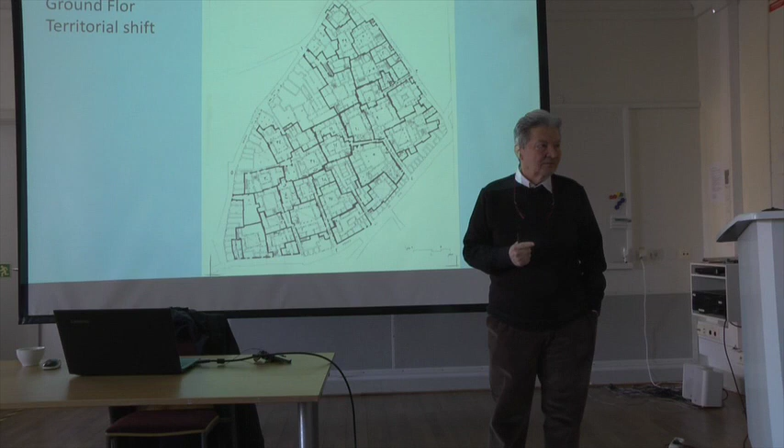We notice that in the traditional environment, almost everywhere, not only in the Middle East, maybe the people don't want to demolish what they built again and again for new functions. So they thought wisely of trying to develop designs or built environments that cost minimum when transformed, whether to other functions or to other sizes. Let me give an example here from Tunis. You see, this was originally one house. It was inherited, and then it was divided. This is the bigger court. But this unit does not have access to the street after division, so they have this right of passageway outside.

Here, for example, it's a nice exercise if you try and find a few changes. Here, for example, this sector was belonging to this one, now it is moved to this one. Maybe the owner of this house died, and he shifted some sectors of his house, some rooms, to the next neighbor, without much demolition. Here, for example, this sector was to this house, it was transformed. So if you look at the whole site, you see it here, for example.

Maybe a person had children and they migrated somewhere else, so he has a big house. He wants to reduce the size of his house. He just sells a room to his next neighbor. So this led to thinking of the built environment as sectors. That's why in the traditional environment, when they talk about buildings, they talk about names of spaces. Each space has a name. But our names now are functional. We say entrance, we say bedroom.

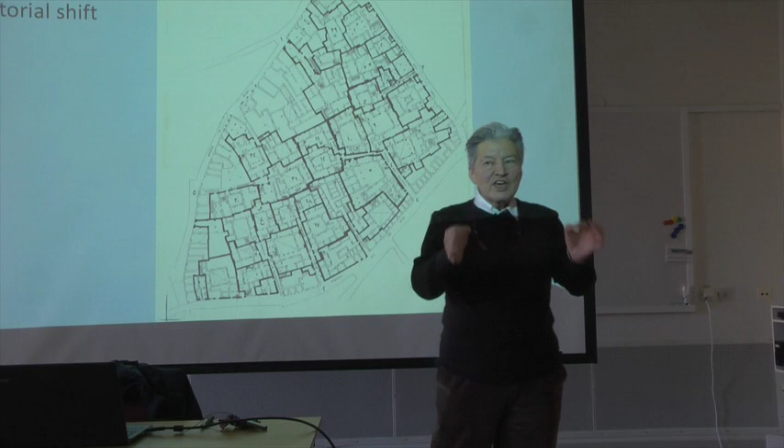The traditional names were mostly not functional, but positional. They describe the position of a space inside a larger context. This is a sunny room, this is a dark room, and so forth. And this is the upper floor.

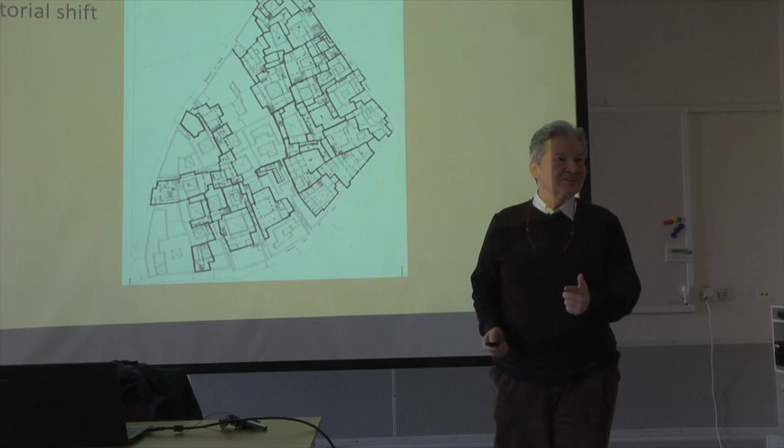Clearly you can see how, like this accordion that they play music, the territories shift between properties over time without demolition. So the fabric is helping the people's required change over time, 100, 200, 300 years, without much demolition. Just closing a door or opening a door. And that's interesting, without much demolition.

This is, for example, a house. This was a house. It was divided. This part was taken by this house. This part was taken by that house. This part was taken by this house. The house is gone. No more. It was between 3 houses. It disappeared.

Now, in order to find a design tool in which users could participate in the future, now the architect designed the building and he goes away. Then the user could come 50, 20 years later, they want to change the function of the building. There will be much demolition. And this is important for sustainability.

I think 30 years ago there was a conference about conservation and restoration. I said, in that conference, why do we always think of preserving the building of the past? Why don't we now design buildings that will not be changed much in the future? They were laughing. How do you do that? Because you don't know what will happen. No, that's possible.

We think of design as a means that allows other people, through exercising their own decisions, to reach their desired life requirements. They should be able to do that without much demolition. So we need a design tool for such task. What's that design tool?

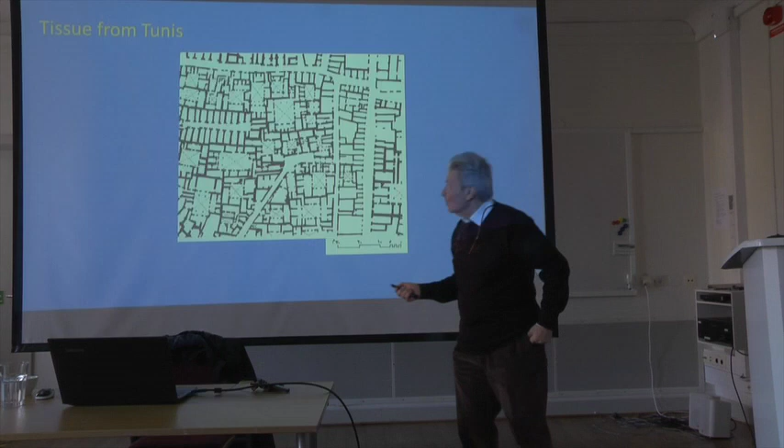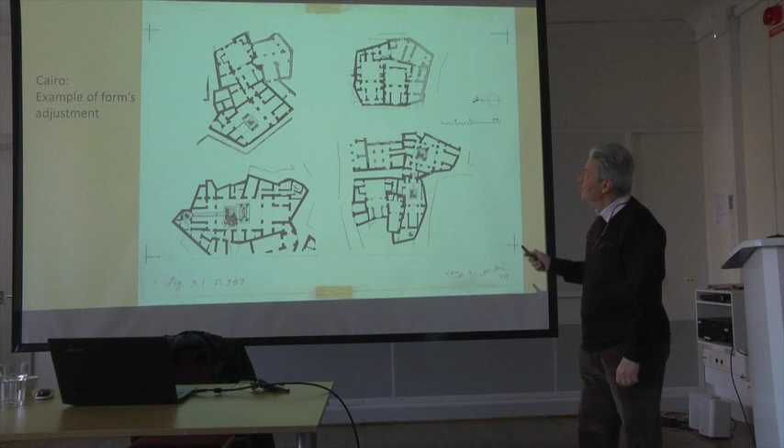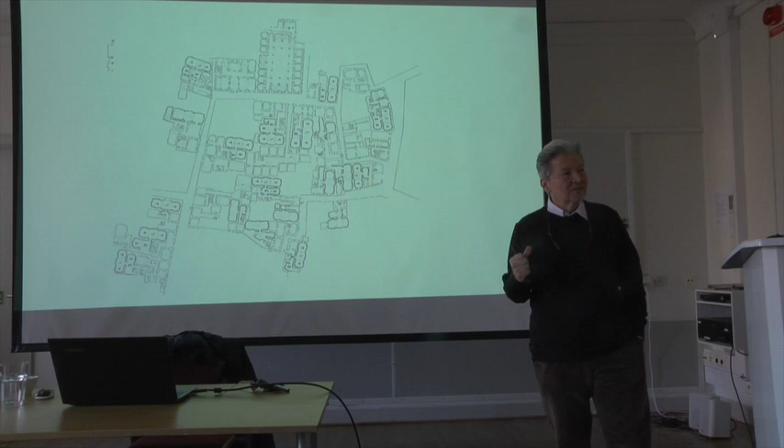Look at the floor plan of a large area of that quarter, and you see the same relationship. 1, 2, 3, those who are Arabic. The same relationship repeats itself. Why this? They're holding up to this convention because they know it works well. They're holding tight to it.

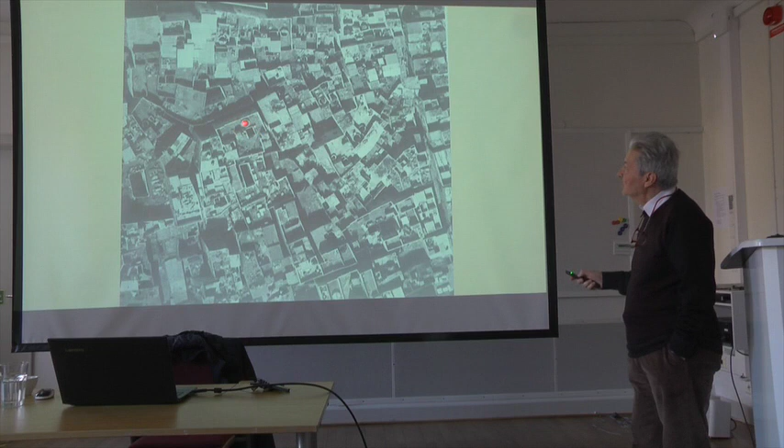And it is the central part, this one, is open all the way. This one is open all the way. So you can see it's here in the ground floor, in the upper floor, last floor. And this is an aerial view. These are the openings. And it's always this shape.

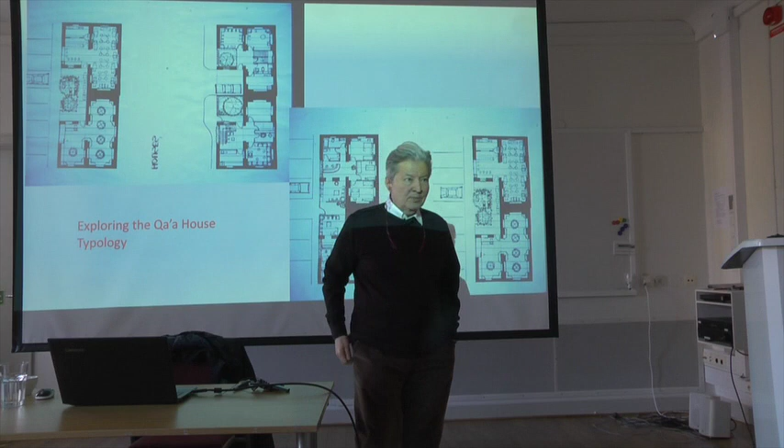Now, I was affected also by work by Stanford Anderson, where he argued that he is the person who invented the term robustness that is now much used in urban design. Robustness means that the physical environment, if it's capable of holding more functions, it is more robust. And he came up with the term latent environment, that a space could perform differently in a way that we never thought of when the people are changed.

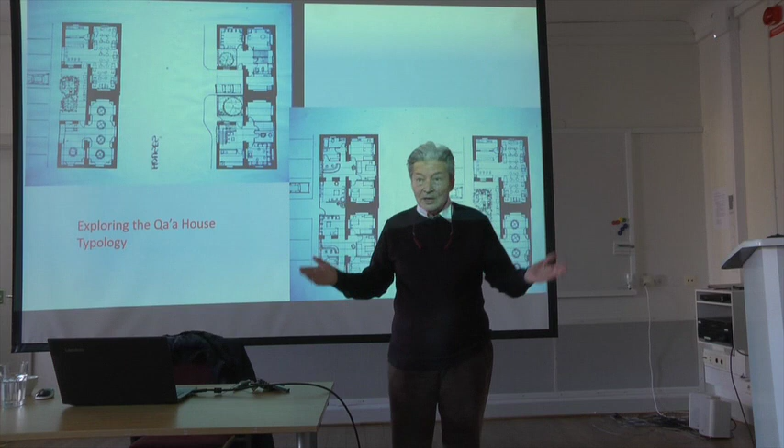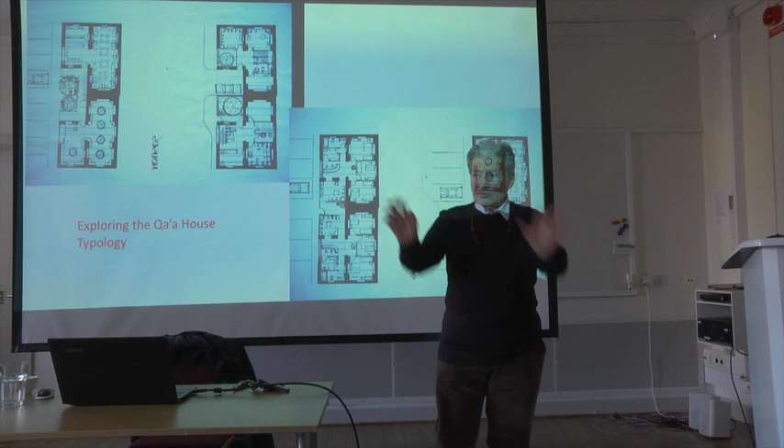If you think of the built environment like that, and how with the change of culture over time, people reuse the space. For example, typing. Before there were secretaries everywhere in the university, a room for typing. Now that room does not exist because everybody is typing by himself. There was a room for photocopying because everybody used to photocopy books, articles, papers. Now they just share it by email, read from an iPad.

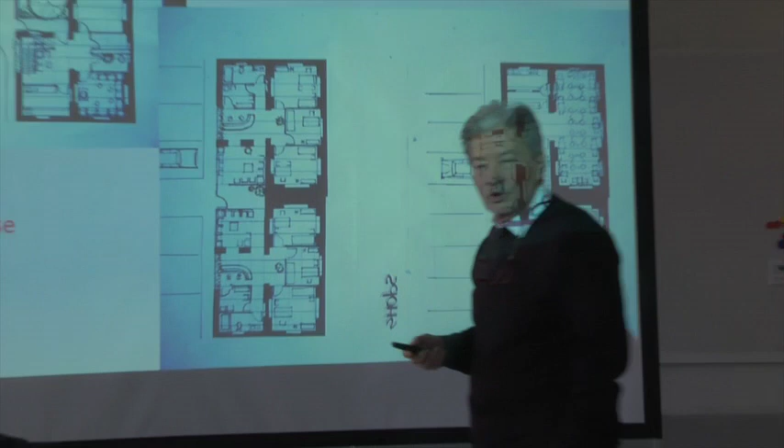So advancement of technology, change of culture, all these change the built environment. So he invented this term called latent environment. Now the question is, how do we design latent environment?

Habraken had a good answer for that, and he invented the word support, which is the parts of the building that can be constructed. When the users move in, they fill that part, then it becomes habitable space, dwelling or shop or whatever. So it is the part of the elements beyond the control of the users. But if the architect is clever enough, he will develop a support that lasts longer in life with minimum demolition.

So designing support does not mean flexibility. Because most people, when they think of change, they immediately think of flexibility. They say, okay, we'll make a few columns inside the building, and then people can move around. No, for the users who are not architects, the columns may hinder them from adapting to change. Because the distances between the columns may take not one function but two functions, or may take 1.5 functions.

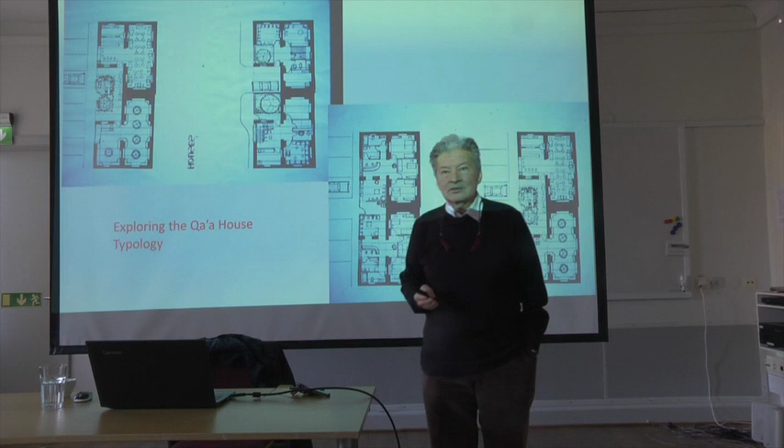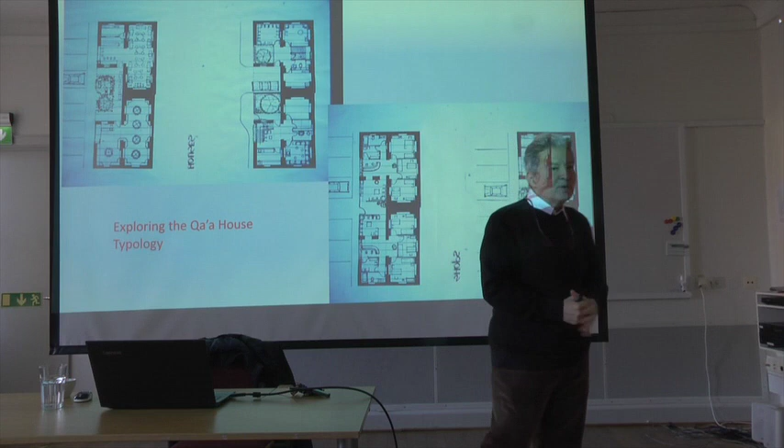So a good building that adapts to change does not mean fewer elements, but it might mean more elements that would help the users in the future and say, this is a sunny place, I can make it a living room. This is a dark place, I can make it a kitchen, and so on. So it helps the users and guides the users to reinvent the space. And this is a challenge.

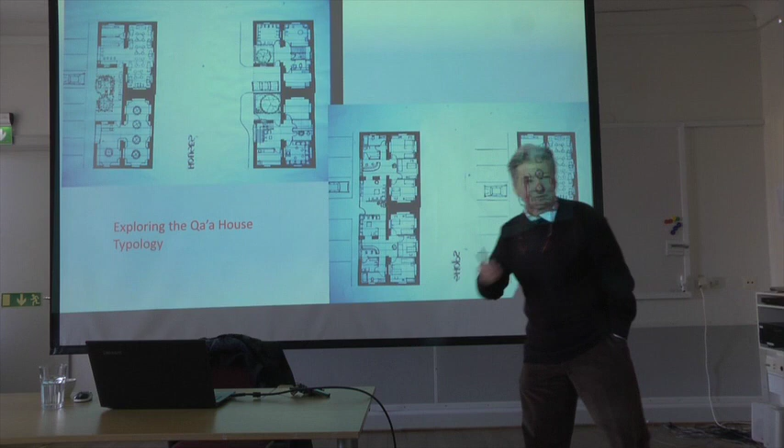Let's take this example. Here, I took just this part and gave it to a student. Just this part. Let's see what's happening. Just explore this relationship. This is that part, he flipped it as a mirror image. I hope you excuse the writing because the guy who did the scanning needs correction. Okay? It was used differently each time.

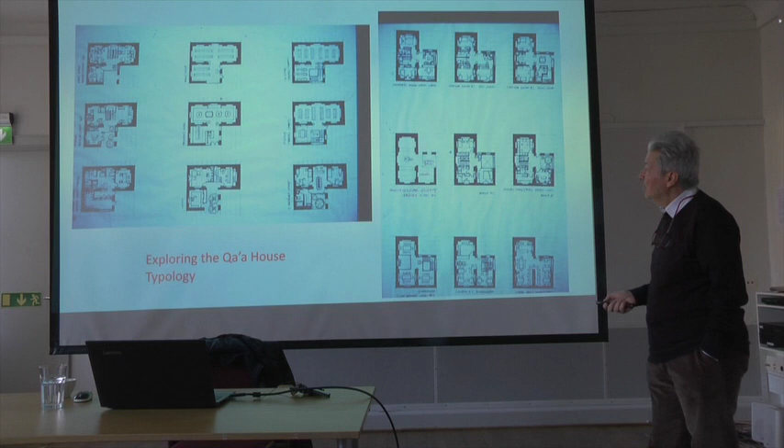Sometimes living, sometimes classroom, restaurants. And it reveals different potentiality. Now we put it, now it is two joined together, now it's three. We're just playing with it to see how it works.

Why do we do this exercise? We hope to understand what elements should go where. For example, a clever architect may say, okay, I'll make a column in the corner there to allow the people more usage. Inside that column, I could put the electric wires, water pipes, and it is a supporting column.

What he did now is that he tied three live systems together, and I like this term from John Habraken, live system. What he did at that time, he brought three elements that are live. The electric system is one system, the water system another, and the structural system is a third. He put them together in one place, which would make it difficult for user change in the future. These three elements should be almost separate.

So it's always difficult to decide where the duct goes in the building. This is another example of exploring a typology.

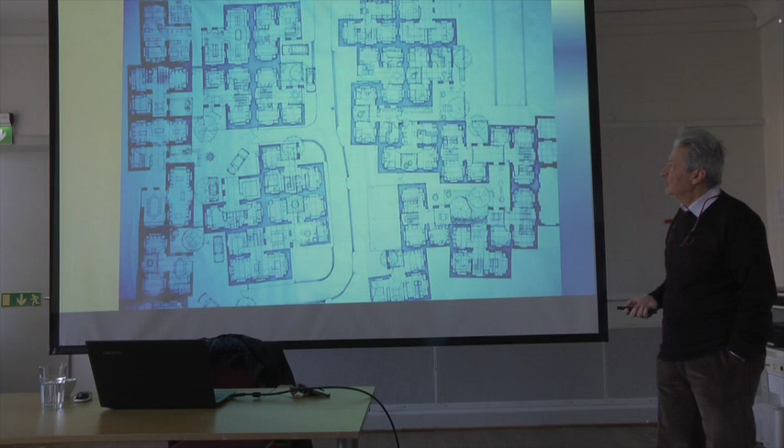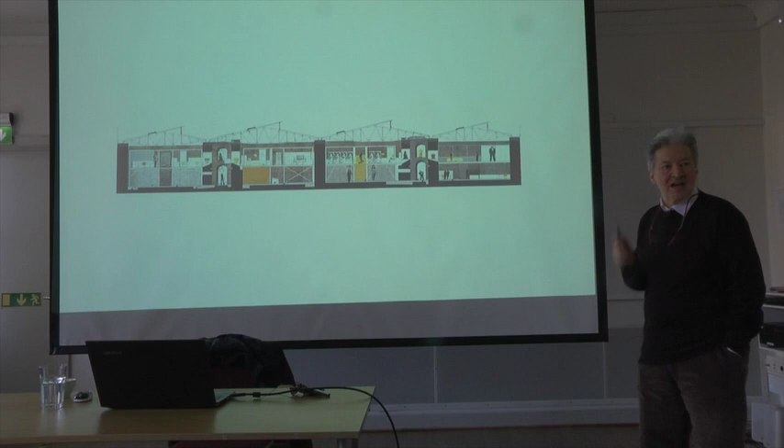This is an example of, you can say, a failed example where the architect, I think in the 17th or 18th century in Istanbul, designed a storage. It was storage first. Simply because it's designed in that fashion, it does not accommodate much change. It was difficult to change because it was designed for a specific function as a storage. Now they are redesigning it to fit new functions, and you can see a corridor without light and so on.

This is another example of a student who observed this structure in Istanbul. So they kept the outside as it is, and it was transformed to another function.

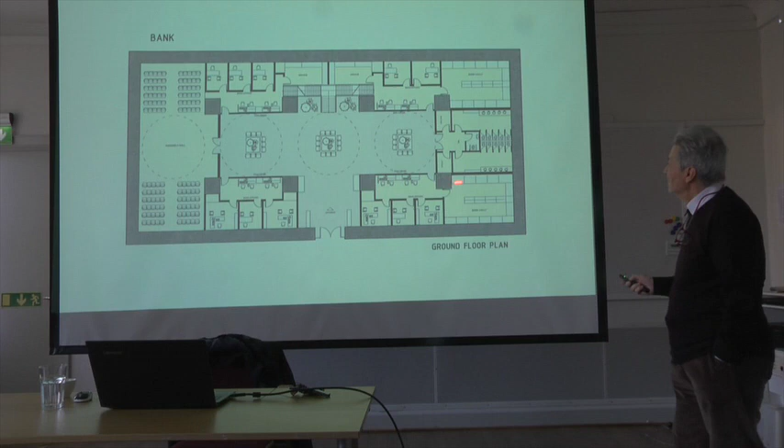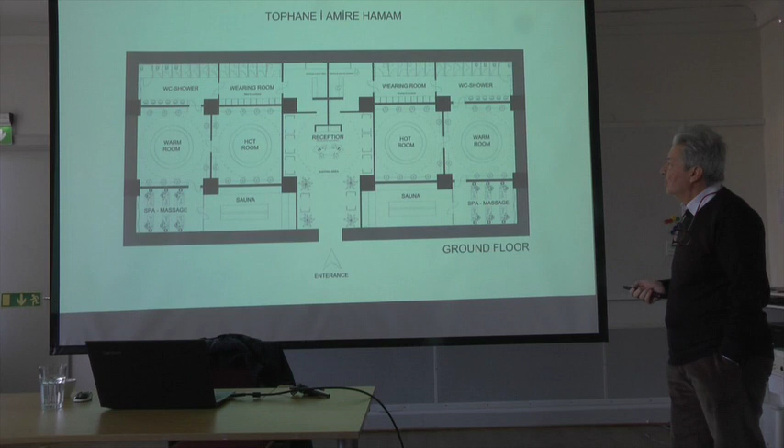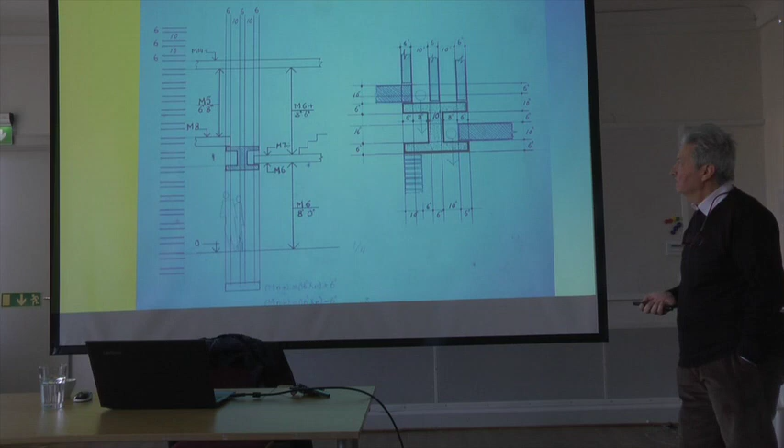What I was trying to say is that the built environment is constantly changing, and we designers are designing something with a specific function that later is difficult to change in the future, and we have to find a method to adapt to change. This means that we do not necessarily design buildings, but rather we create a system that becomes buildings that adapt to change. So what is the system?

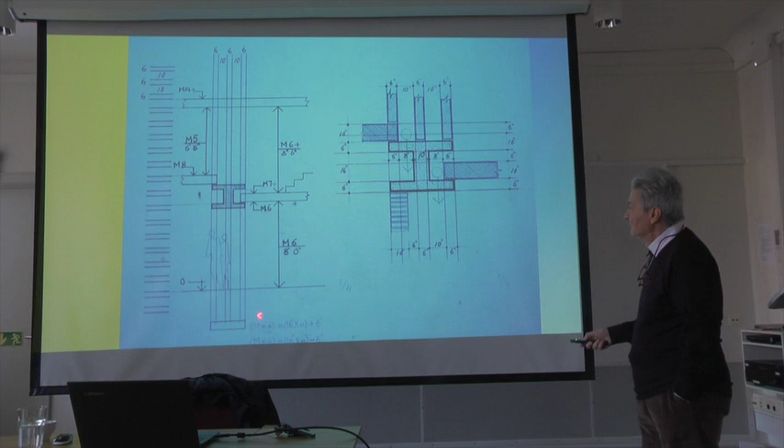Let me take this example that was designed by Jamel Akbar, and I did the drawing, where the system is a large I-beam, a slab that can come here or there, and this I-beam is running parallel, carried by walls, by columns, and it could be like this on the side. This is square, this is a large building, and these are the columns that carry that I-beam.

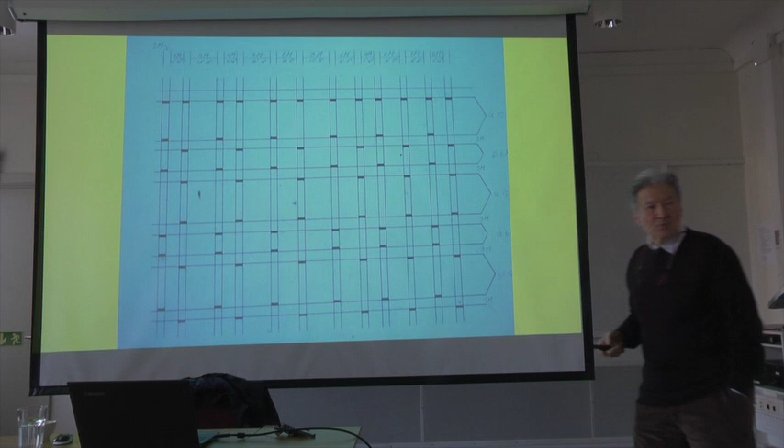So there are varieties of distances here, which is another study that would add more potentiality to the site. So these are the I-beams and these are the columns. Now we can plan the section and we can have varieties of heights in the section because of the I-beam.

Street, two sides. Now, if you remember in the beginning, I talked about margins, and that this is the zone in this building, and there is a margin, and there is another zone there that is not facing the outside. This zone will draw functions to it simply because it is facing the facade.

The same here, there is a zone here that we call the alpha zone, and there is an internal zone here. Between these two zones, there is a zone. So we should expect, from observation, certain functions that can be drawn into these zones, that the user most likely will do in the future.

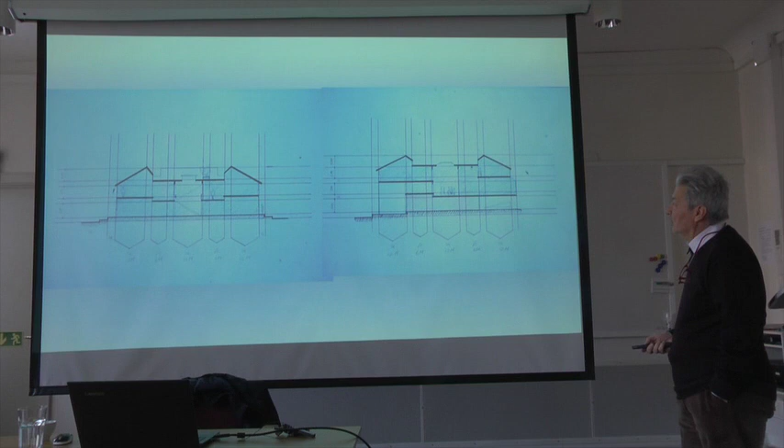Another type of this: commercial on the ground floor, residential above. Now this is the interpretation of one of the students, the American student, of how the floor plans can work. This is my drawing. At that time there was no computer, so it's hand drawing.

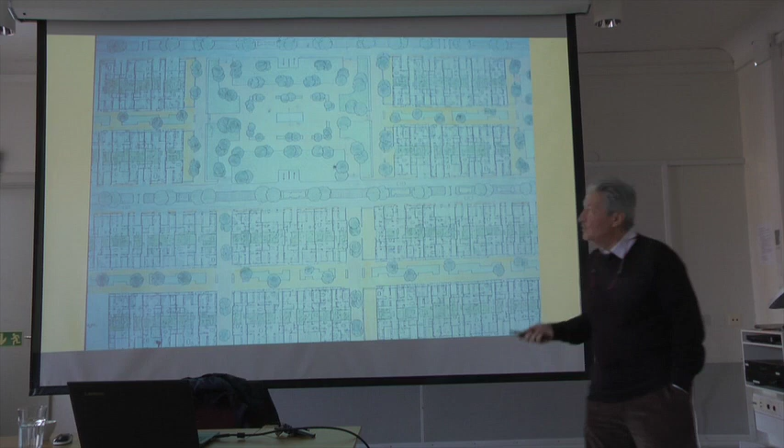And you can see there is a small size unit, larger size unit, units that are divided into this part, second part, and so on. So there are hundreds of possibilities that can fit the system. And this could serve the user's needs in the future without much demolition. And that's good for sustainability. This is another student's work. A third student's work.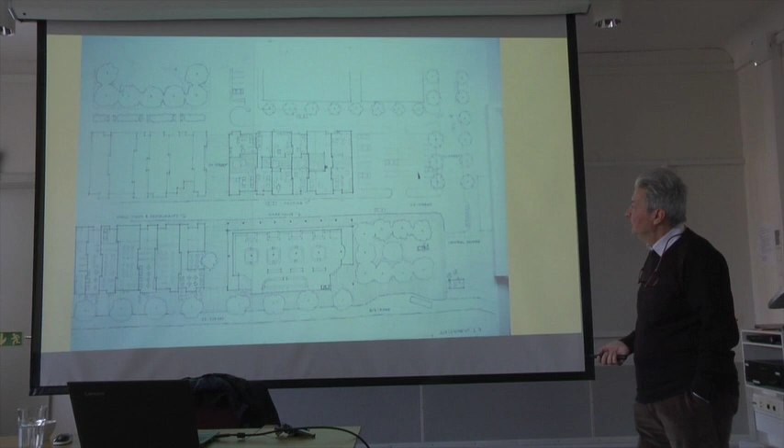Now, unfortunately, this line of thinking stopped. It continued within the capitalist system. If you remember the first day we talked about capitalism and three essences for accessibility: for resources, knowledge, and permissions. Because capitalism continued, and especially Reaganism, Thatcherism, the 80s, and so on, Habraken was retired, and this line of thinking continued fast within the capitalist system, which we know now as the open system. The open system started from this method.

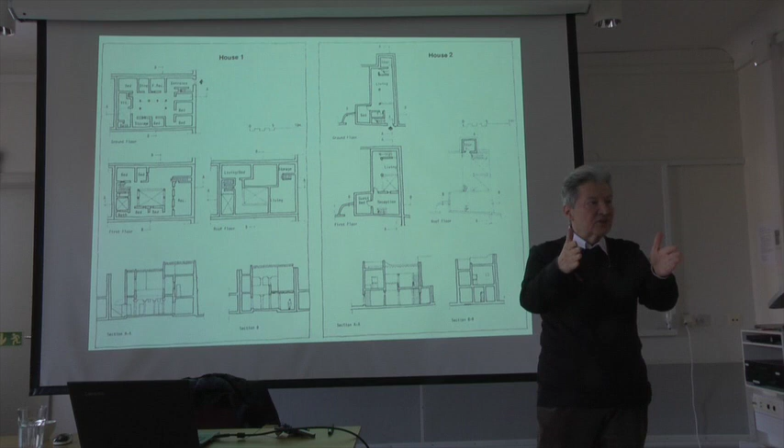Now we see in the office buildings, they have open space, they rent you a space with a few columns and surfaces. The origin of that is from here, but because of the economic structure, the investors have to lean to the user's request, so they sell them spaces with maximum freedom. And it flourished well in office buildings, but not in the housing sector. So this line of research somehow stopped. Hopefully it will come back.

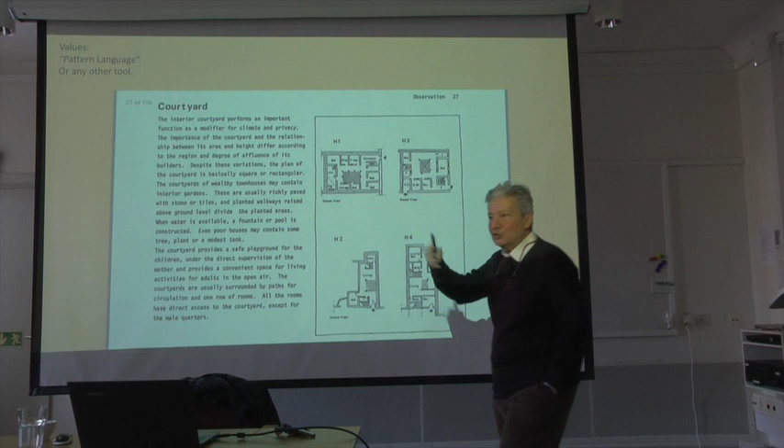Now I'll show you a design that I made, trying to create space that's adaptable to change. This is a traditional type house in Saudi Arabia, but this is not important. I just show you to show you where I'm coming from in the design. And you can use the pattern language of Christopher Alexander or whatever to express your values about how you want the built environment to be. But it's important here to realize that later people will come with different value systems than mine to reinterpret the space for a more robust or latent environment.

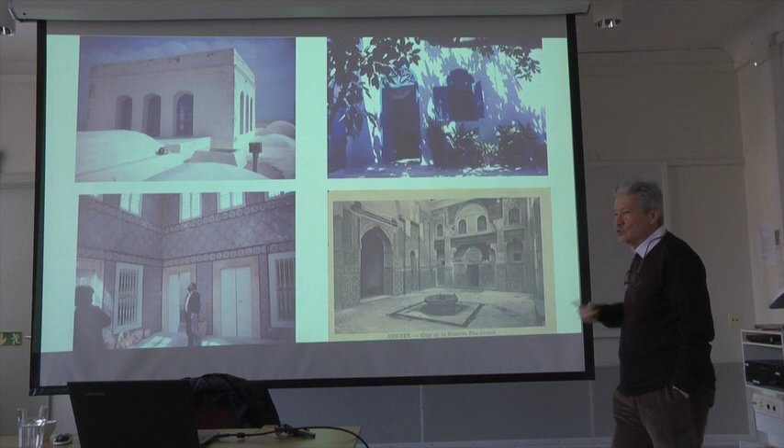So I decided to design a support for courtyard. So the courtyard has its own beauty, its own patterns, its own character. We will pass through these, so you can always interpret the courtyard, how it works in terms of privacy, how it works in terms of accessibility, how it works in terms of being a loop, that people can go around it. But this is not important because it's my values.

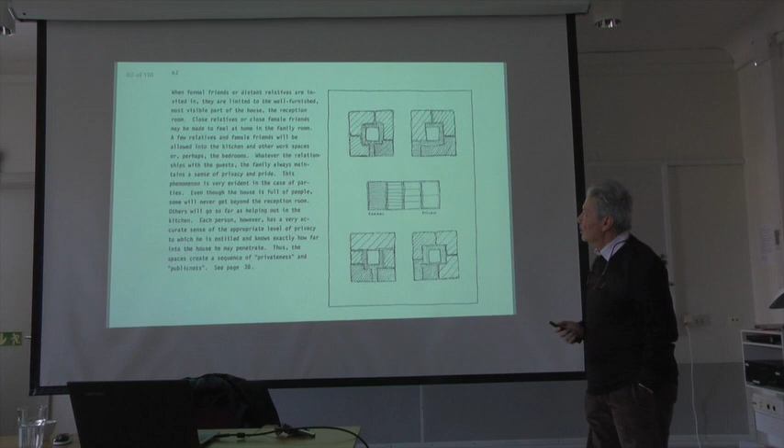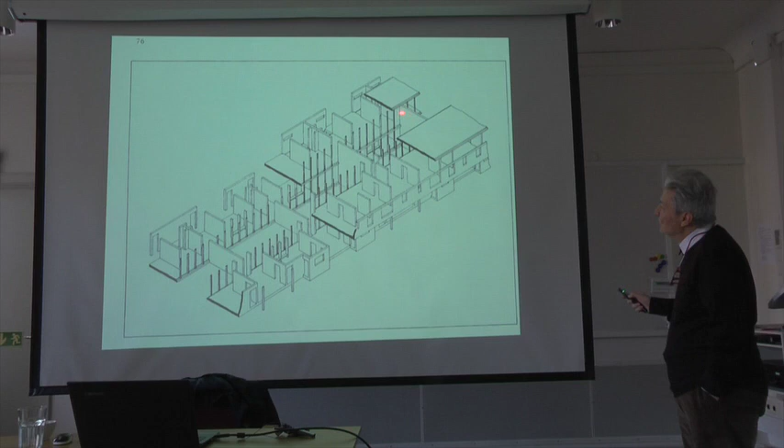So it starts simple, then it gets a bit complicated, but it's very simple. And the system, to be understood by the people, has to be very simple. But when they interpret the site, it will give them what they need. Although it might look complicated for outsiders, for the users it is simple. And between these two build zones, there is an open zone. And now this is the build zone. This is the zone that's facing the outside, and this is the margin, and this is the margin. This is where the courtyard can go, to these locations.

facing outside. Now the first decision: if you remember when we showed Tunis, where with minimum demolition, the size of properties increases or reduces. The same here, because the design is thought of as sectors. This is the smallest possible unit, and this is one of the largest possible units.

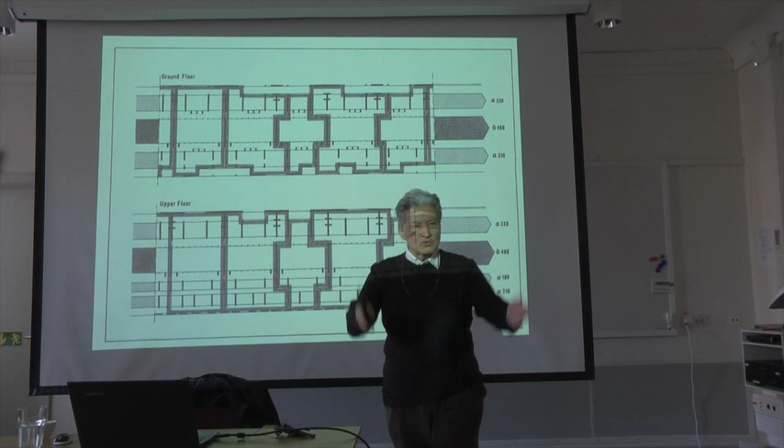Now somebody will say, well, we are used to looking at the built environment as rectangles of parcels, or squares of parcels, and not zigzag. Now, in the traditional environment, people used to buy and sell spaces that have names. Not functional names, but positional names.

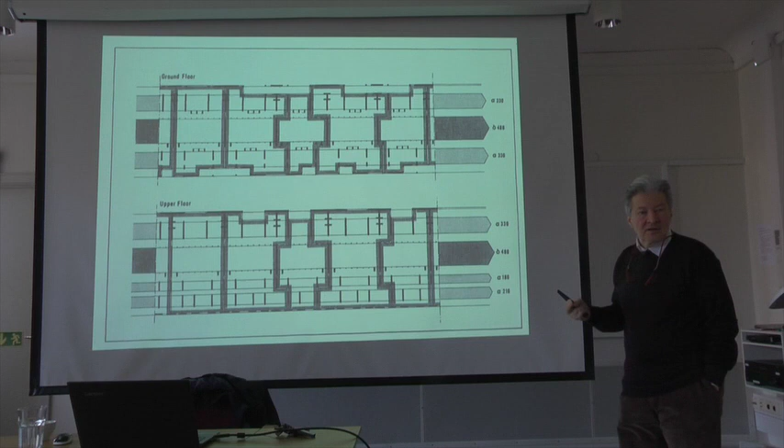So this is the smallest unit, larger unit in the upper floor. So the first decision to be made, maybe by the government, because the people are different in sizes, they will give them different sizes. Maybe by a developer who wants to develop a site for profit and sell it. At least he can have different possibilities. A student living alone may take this side. A big family may take this side. So there is this option always for providing varieties of sizes.

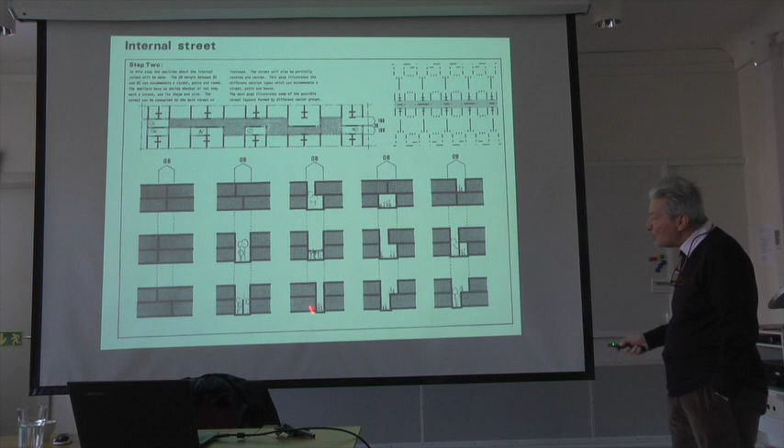The second layer of decision is that if we put the support back to back, this area that's open built could have the possibility of developing an internal street between different units. Or it could have the possibility of having a small garden or a play area for children within a hot area with overpass, or small terrace, or terrace plus larger terrace plus a garden, narrow street, or even the property line can have these possibilities. So the internal street could be like that, or a dead-end street, or it could be no dead-end street, but connected units.

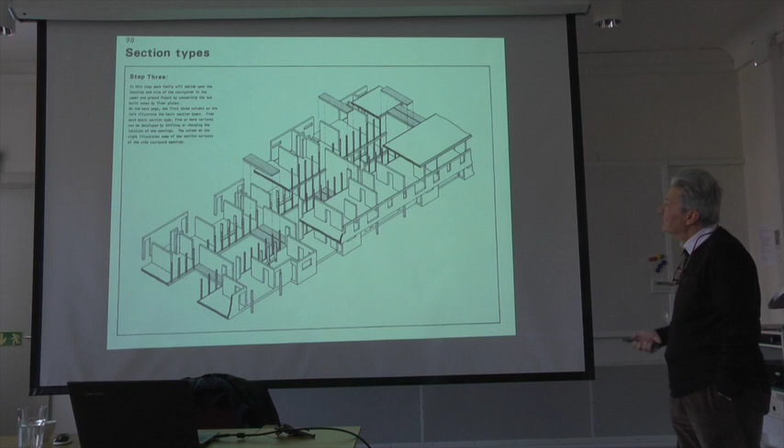Now the third layer of decisions is that in the space allocated for courtyard, these plates made of concrete, of steel, or whatever, could be placed here between these 9 I-beam columns, where the size of the courtyard could be large like this, or could be small like this one. Or it could be in the center, bigger in the upper floor, smaller here, or it could be from the side, or it could be larger from the side. Hundreds of possibilities. Because each time I can put the opening of the courtyard here, or there, or there with different sizes. And I can shift them around, depending on the people's request.

And gradually, maybe a developer will build it and sell it. He will go away, we go away, 100 years later. Now, what happens? The newcomers will change it for different functions. And they may change the location of the courtyard without much demolition. And this is good for sustainability.

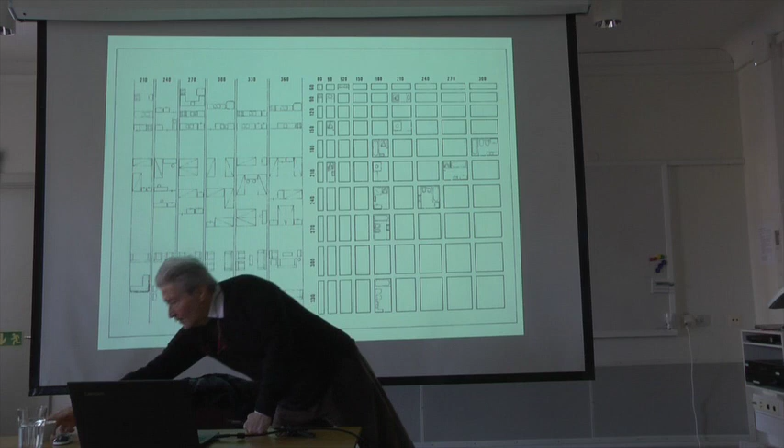Now, in order to reach a level of making sure that the spaces between the support elements are almost right, closer to the limit than others. This is also a chart that was developed originally by Jamel Akbar, where it goes from 60 by 60, increases every 30 centimeters. And for each function, we can make a chart. So I can say, for example, the smallest area is 60 by 60 for a washing basin, and maybe one small toilet or toilet with a bathtub.

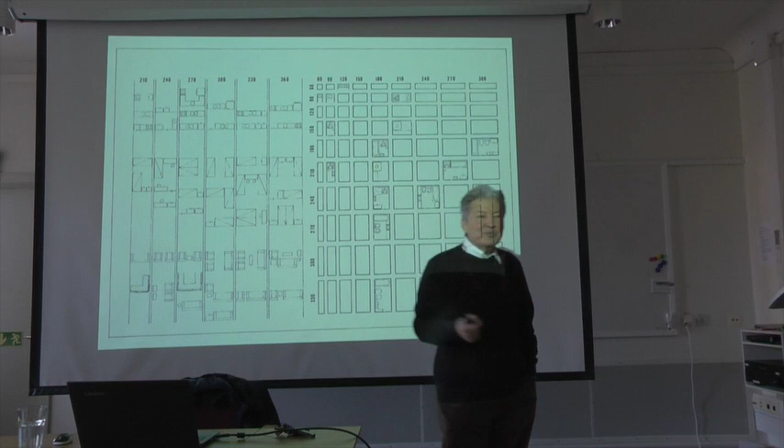So each culture will have its own chart to some extent. And I can draw the line and say, okay, my values say that I cannot go smaller than this. And this is the line that I will draw for the functions and the spaces that are acceptable to me, according to my values. This is in a linear fashion. 210 is the smallest possible place for the oven and cabinet, maybe the kitchen cabinet, maybe one-person bed. I cannot have a 2-person bed, and this is the first time maybe I can have a 2-person bed, and so on, and it gets larger. So I'm trying to find the critical dimensions for the spaces that I will use for the support.

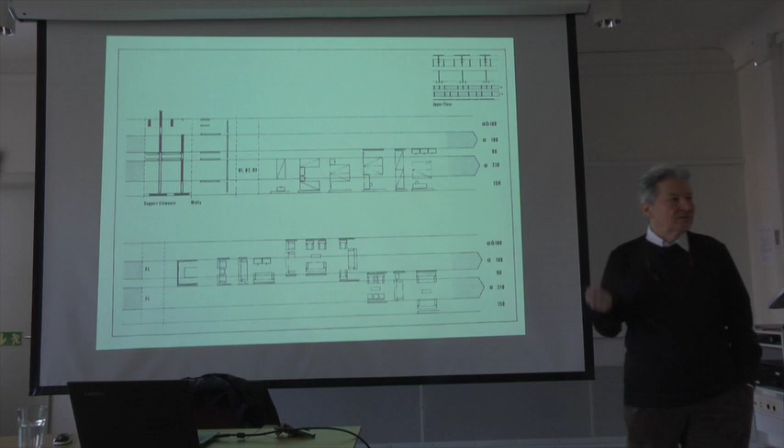The same goes for garage, for all the other functions in the zones. So this chart, for example, explains the zones usage. For each zone, we have to develop a chart. Then we expand the zone, reduce the zone, expand the margin, reduce the margin, to find the possible layout of the support elements. This is a zone, and this is one sector that takes two margins. This is one sector, takes one margin. This is divided by two.

This is a small toilet with a one-person bedroom. This is an entrance hall. So these are the elements that I can introduce according to my values in these sectors. This sector, other sectors. So each time, this analysis for this sector, this analysis for this sector. So we go through them one by one. That's why architects don't like it, because it's tedious work, too much work to design a support. Other possibilities: there is the margin here to the courtyard. Exactly, this sector here, this is the zone.

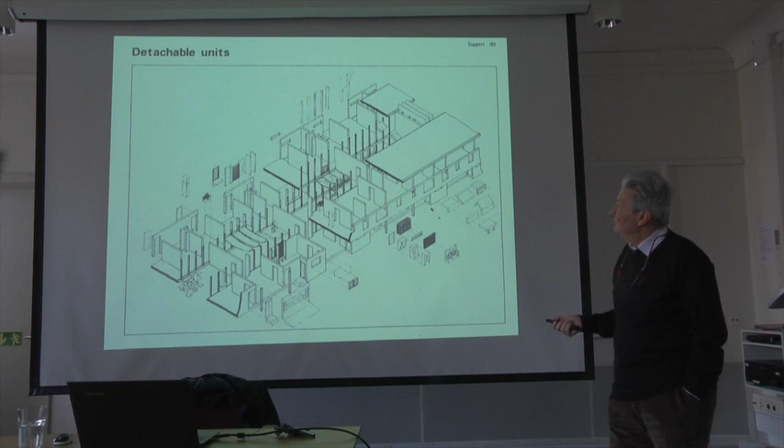Now, if we place those physical elements that are simple into the support and easier for users to handle, that don't need much intervention by construction people, we could have this type of floor plans. I'm not asking you to accept this design. What I'm trying to do is convince you that we should think differently of the built environment that we are designing as if it will not change. And it constantly changes.

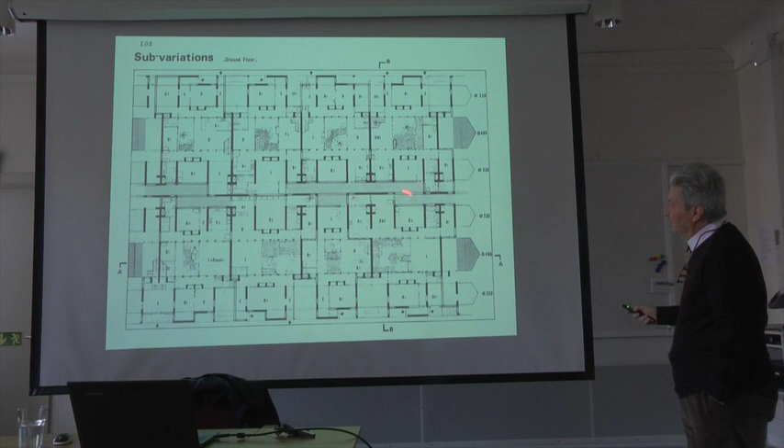This is the ground floor, for example. This is a large entrance for apartments going up, another unit, third, fourth unit. This is a unit, for example, a larger unit, for example, a person, maybe his mother is living here, or his son, or whatever, and there is still the family there. So when they go up, they are split into two wings. And this is one of the smallest elements, and so on. This is the section.

Now, what you've seen is my interpretation. So I gave it to other students to interpret it differently. This is an Egyptian student. He looked at the same sectors, and he interpreted them differently, because there are in Egypt daily activities like small workshops for carpenters, for laundry, and so on. So he tried to fit those services into the support.

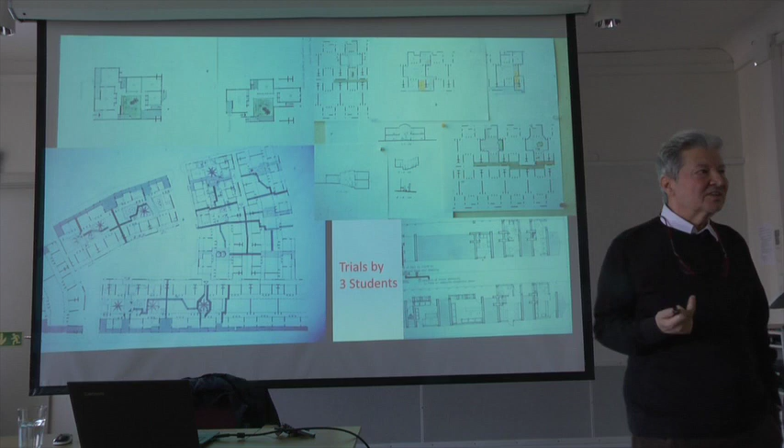This is another student who said, okay, let's do it this way. And I think this example failed. Why? Because my support was rigid, was not systematic. Now I have to think of it, rethink of it again as a system.

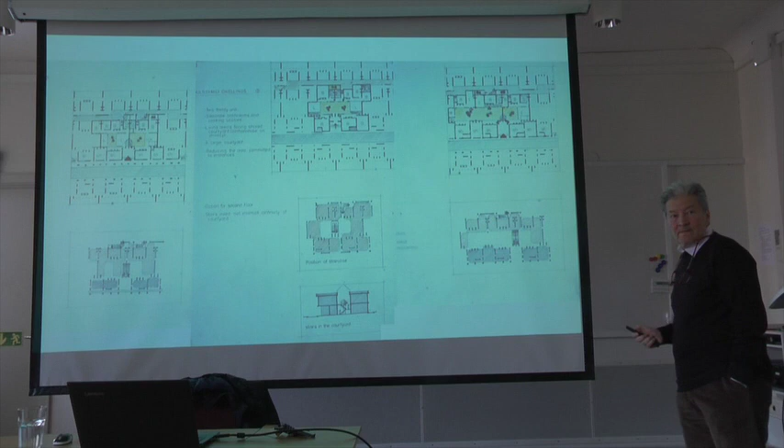What alerted me is that this student said, okay, why don't you think of it as not one support, but two linear running parallel. In that case, you can have units like this, units like this, and one large shared courtyard for other smaller units. Because there are no large families maybe in that part of the world, there are smaller families.

There's another interpretation by another student. So I said, okay, now we have to rethink the support. It failed, because it did not work very well with those students. So one goes through circles and circles of evaluation. So, okay, in the tissue level, or in the urban design level, it does not work. How can I do it? Like this? No, it's quite rigid. It does not fit a site that topographically does not support rectangular parcels.

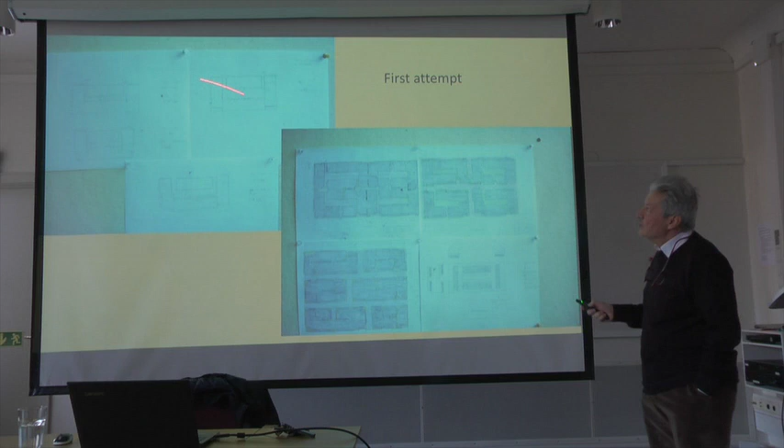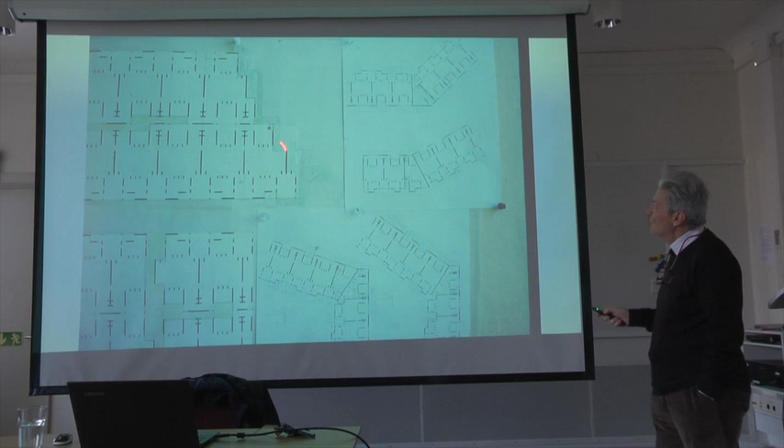So a study was made about the parkings, about the cars, and so on. And this is quite rigid, as you see. Very rigid, because of the dead-end street, the side streets, and so on. This does not resemble the traditional fabric where things are more smooth, how it works in the dead-end street. Does it work here? So we have to develop the system.

To do that, first we have to study the potentiality of the street. Maybe you won't feel that here, because most streets are one way, but in the Middle East, sometimes you're going this way, another car coming this way. You say, if the street were 60 centimeters wider, we both could have passed. So the street is not used for its maximum potentiality. To do that, we have to study the potentiality of the street.

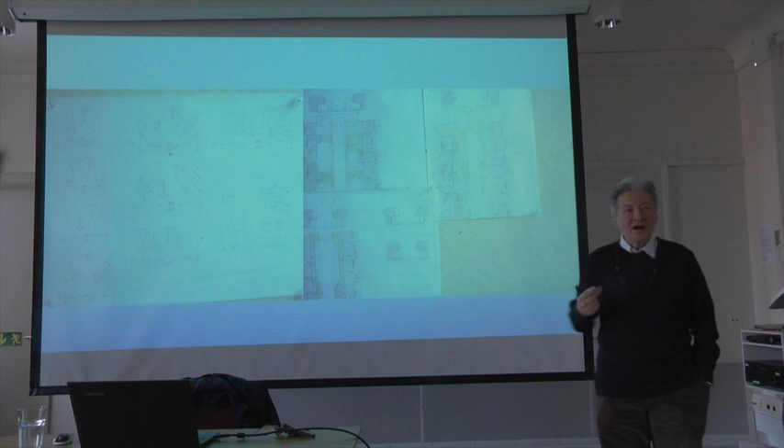And now, unfortunately, what they do in urban design, they take a site, they ask the student to redesign that site, or improve the site, and they think of functions and locations of elements, and make a theater here, or a bus station, and so on. I think it should go exactly the opposite. You look at the fabric and the property rights and the parcels there and see what are the possible potentialities that come out of these constraints. We explore the potentialities, then we select from those the possible solution that goes in line with our budget.

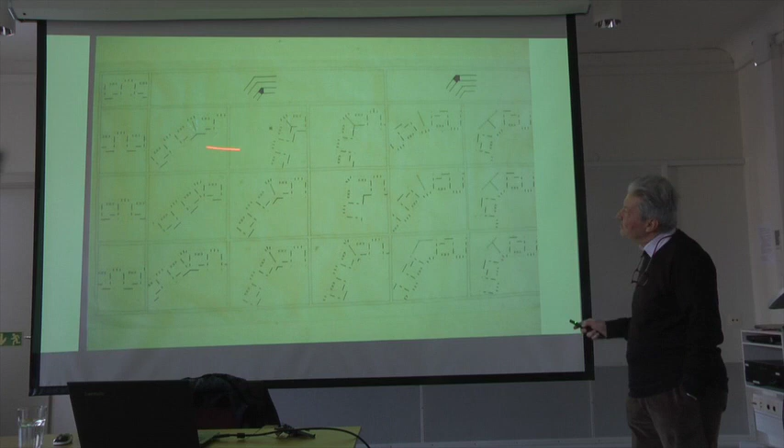So now I have to look at each sector, analyze that sector, and how it might go if it bent. So for each sector, a chart was developed. Little bent, more bent, maximum bent, and so on. Each sector was analyzed to develop almost a guideline for those who will come later if the support was implemented.

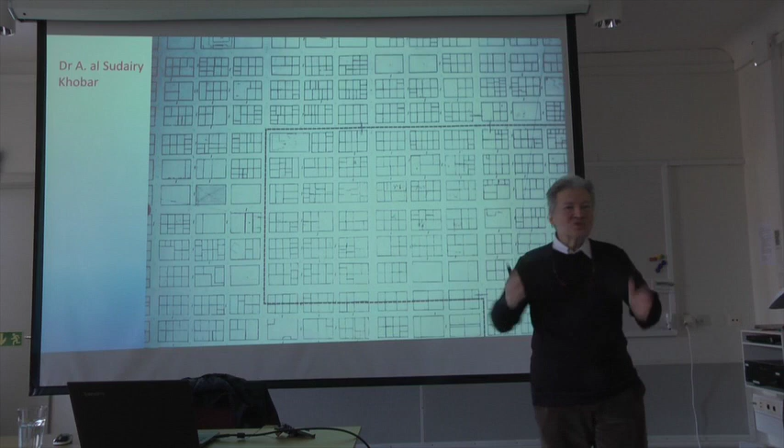Now, this is another student. He is the dean now of the School of Architecture. It is the largest school in the Middle East. We have almost 120 faculty, 5 departments. He did his master with me, and there was a street in Khobar city. It was called Residential Street. With the oil boom, gradually, suddenly, nobody knows why, that street became a heavily commercial street, the most active street. We wondered why this specific street, not some other streets.

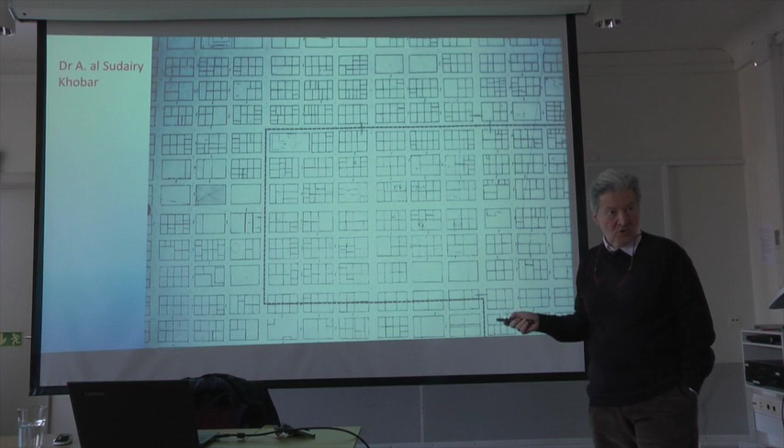So we have to look at the larger picture of the town, and we noticed that it is 2/3 away from the sea coast to the new area. Anyhow, that's detail, not important. But what was interesting is that this outline design was originally done by Americans when they came for oil. They are the ones who laid out these rectangular blocks.

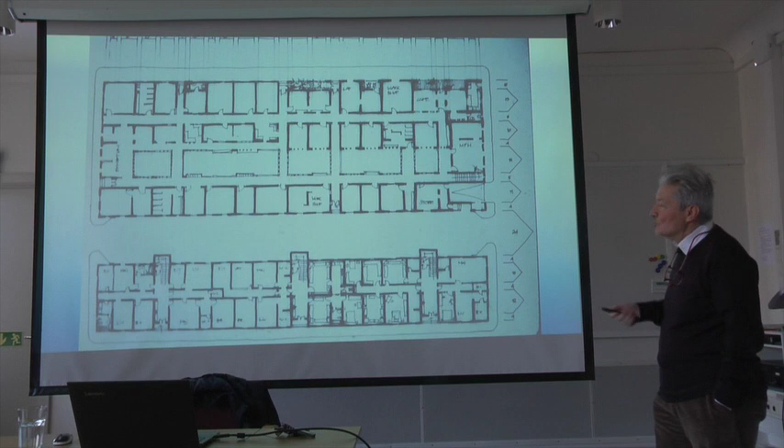So he looked at those rectangular blocks and said, okay, I will design a support to fit those blocks, because we cannot control the street layout. We cannot intervene in that. We have to respect that and design within it. So he proposed this layout design. Sorry for the bad slides. Then he proposed this type of columns and this type of support, so the area can be transformed in the future, because we know that area might be commercial. It can be transformed easily from residential to commercial.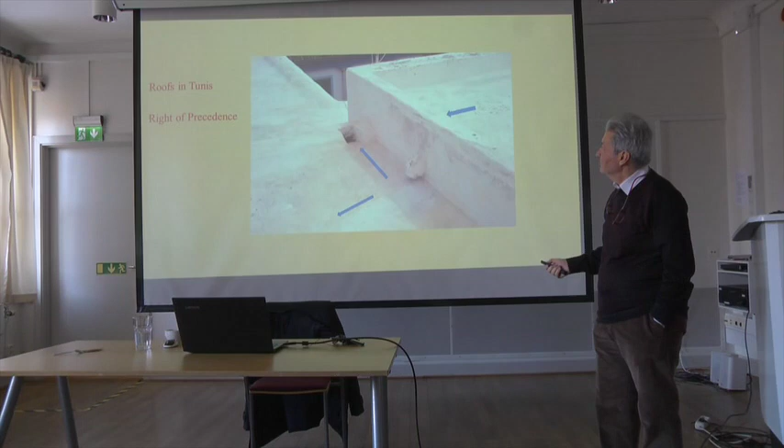And we said that if the people had access to knowledge, free knowledge, permissions, resources, we should expect the structure of the society to be composed of people quite similar in their income, and the production industry to be composed of people who work in their own production line. The owners of the company are the workers, unlike our situation. Now, how does this relate to your question? Because everything is based on convention, and the people had the power.

In that case, if we design the support, the zones on the margin most likely will reflect what the people decided and agreed upon. We observe that, and the role of the architect becomes an enabler. Because the people had access to resources, because they developed the conventions, they're less likely to disagree. And then when the architect sits with them, almost everybody understands it, and there is little disagreement.

Now, if we remember also that the square is in the unified form of submission, where the people surrounding the courtyard are in control, even if they disagree, because they have shared interests, most likely they will resolve their disagreement fast. Here comes the role of the architect when he looks at the margins, for example.

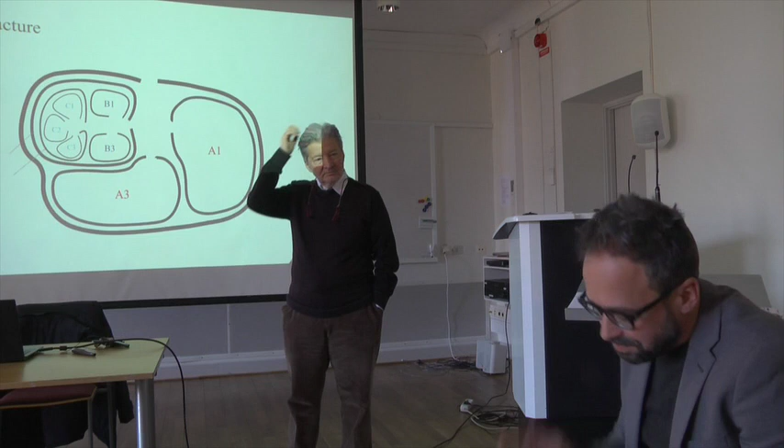I was also trying to put this. Now that we have these three different moments of your research, I would be interested to know more if you give us a little bit more the context, almost the biographical context in which you developed these three different research questions or even approaches. So as you said, for example, in the lecture of yesterday, this was a specific time in which you were living in the States.

So for me, it would be more interesting also to try to imagine how this research trajectory was linked to your personal experience in the place where you were, and how that resonated or not, the proximity and the distance with Saudi Arabia or with the West, and if and how that influenced some of the questions that you had in this sort of research.

And then maybe a little bit strange observation, but maybe it's also a question, because there is always this sort of almost Kabbalah kind of three as a number, which you had when you talked about the forms of domination. There are three forms of domination. You talk about the other important point that you made: resources, access, and knowledge.

I'm wondering if you will acknowledge or not there is also almost a theological understanding of the monotheistic religions that still read reality through this kind of lens, or not, or it's just a wild hypothesis. Okay, very good question.

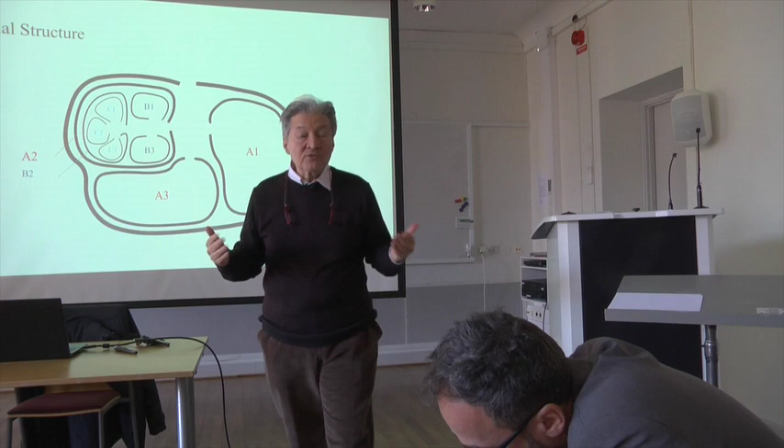I took in the second lecture the example of responsibility, where I was arguing that we need a new paradigm of developing new theories, proposing one, others will propose others. But we have to come out of this debate of proposing new ideas. But we cannot only think of architecture and urban design within the capitalist system, because changing the capitalist system needs, God knows, what type of revolution. Where it will go, we don't know.

But at least if we had studies like these, measuring responsibility, participation in design and so on, we might sense a bright future that would make the people, especially in the West, move ahead. Because here it's easy for you to change governments. In other parts of the world, like Egypt, it's impossible. So we need change. What I'm trying to do from my own profession as an architect is contribute to that by looking at these three levels: the highest level, the economic system, then the professional level, then the practical level. So this is my answer for the whole thing.

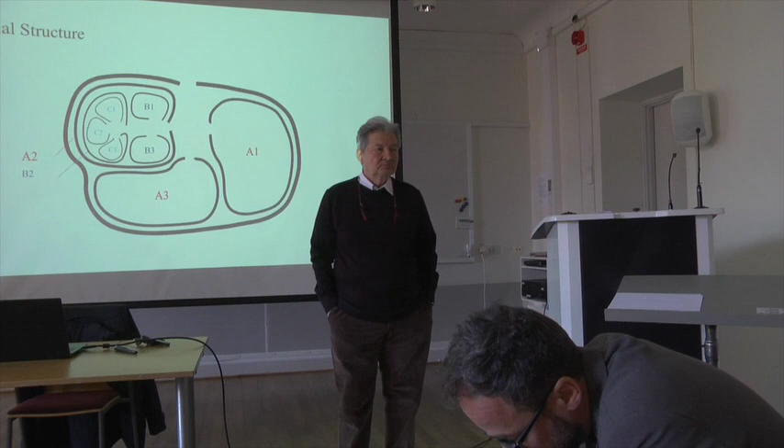I think having posed so many questions these days, I felt the need to digest what you have presented. So I have this feeling that I will have 10 questions in 2 weeks. Then I hope we will at least meet. We can continue all of the conversations from here.

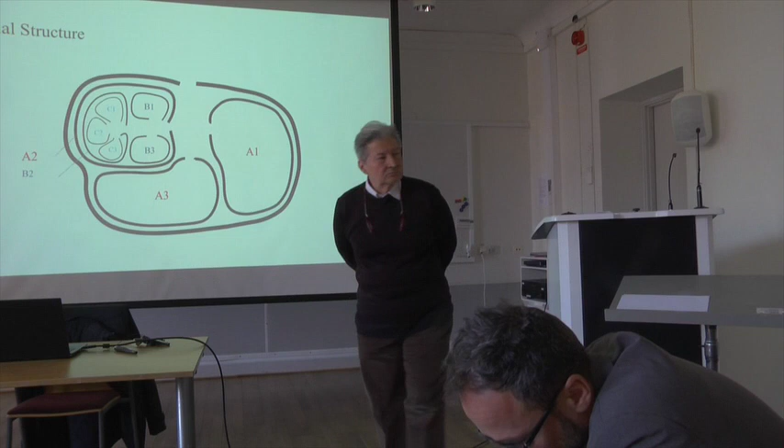But, and this is how I perceive it, the 3 days is very much about the possibilities to create conditions for responsibility. We have touched upon it, but I'm also curious of going back to this, that of course we need resources, knowledge, permission. I'm with you so long, but we haven't spoken so much about how we come from here to there.

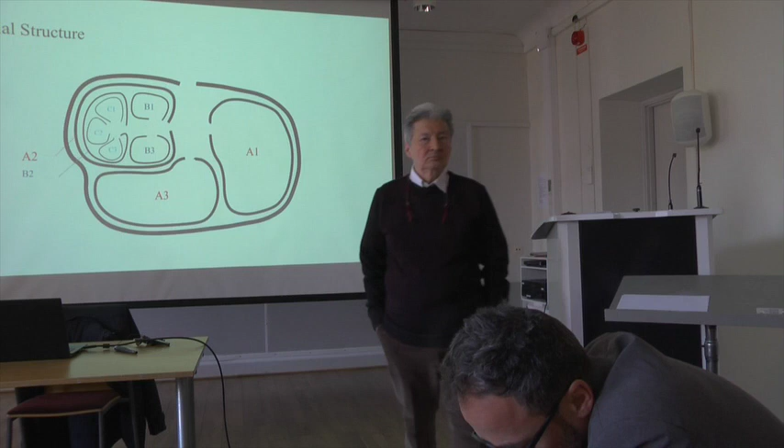Without highlighting this way there, we risk almost naturalizing something if we're not speaking also about the obstacles for us coming there. So I would be curious for you to elaborate, and of course you have spoken about it these days, but I would like to take the chance to hear you again speak about the obstacles you see today for people to be able to feel this responsibility. And the other thing, the obstacles you see today for us to perceive

change. Because I think this is the other concept that has been reoccurring these 3 days, and I was very happy for it. Because there are very strong forces today saying that today's world is the only possible one. That we couldn't organize it in any other way. There's no better way to organize the world. And I think this is something that I personally struggle with every day.

How could I at least get the tools to imagine other possible ways of organizing everyday life? And I would like to thank you that you from the beginning tried to do this. So also, what are the main obstacles for us to see change? I understand these are huge questions, but I would love if you would say something.

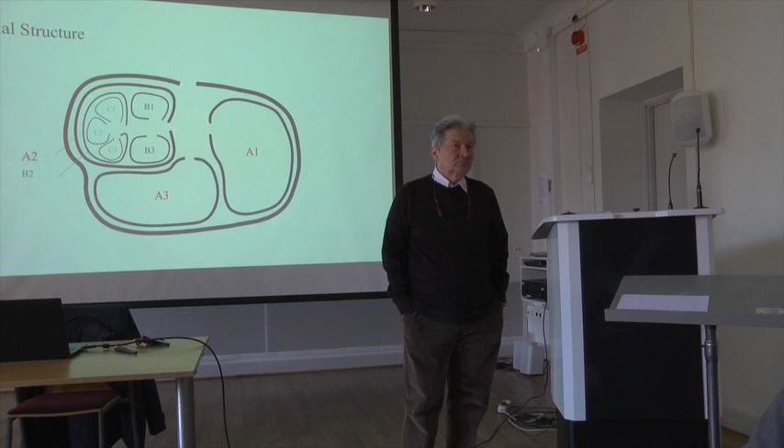These are two important questions. How do we move from theory to be realistic, and how can we implement it? I am the only person who is fighting in this. I hope others will join. There are people like David Harvey, and I showed you some of them that are trying. But the thing that most of them did not look at or explore is the condition that people should have access to these three without any control or any intervention.

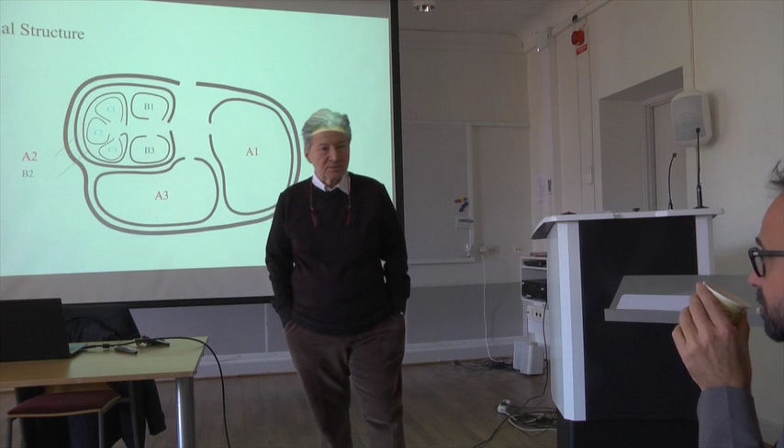This, I think, is a contribution that should be looked upon compared to the production of goods, the necessities, complementary and so on. And I think this is important, but how do we get there in practice to implement that? I think it needs the cooperation of so many people in research, in bringing awareness to the people about this, especially to theorists like David Harvey or Jamel Akbar, that, hey, listen, there is some other way of looking at things. Through awareness, with more and more research, we can see the positives and the negatives.

But we have to move, because as I showed you, in the best cases like the Scandinavian countries, where everything is transparent with the government, where the people had almost all power and so on, if we keep living like that, we need 5, 6 Earths to sustain this type of living. That has to change. We cannot continue like this. But that does not mean we should change to a lower or backward situation with lower consumption. No, but our attitude should change.

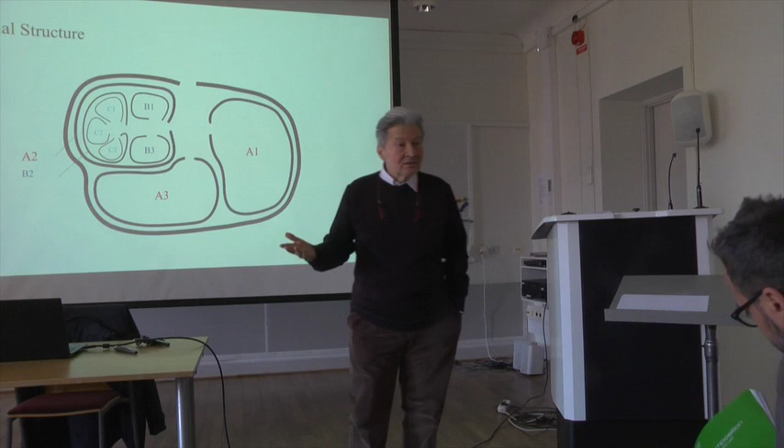How do we get there? It has to be studied. It has to be explored. But we have to think of a way out of our situation. So my answer is that yes, we need cooperation. We need awareness. First, awareness. We should talk about the subject. The subject is not talked about.

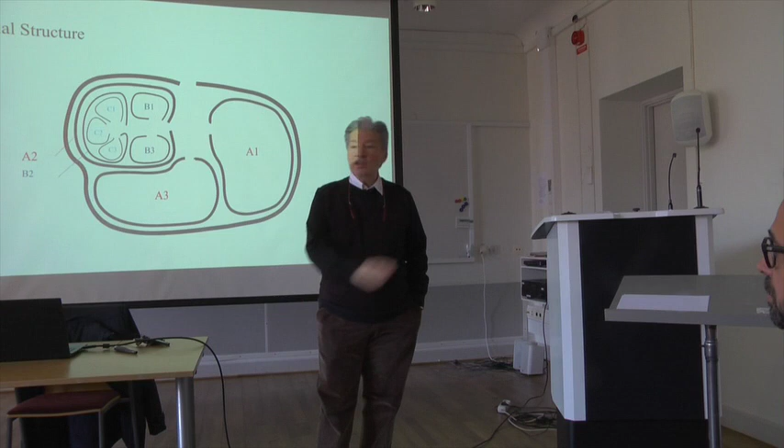They are thinking of solving sustainability issues within the current paradigms. And there is no way out. That's why I try to. If you agree with me on the first statement, that we are heading to an unsustainable environment, then what do we do? Bring awareness, think outside these paradigms, and that is what's needed. Thank you for your understanding.